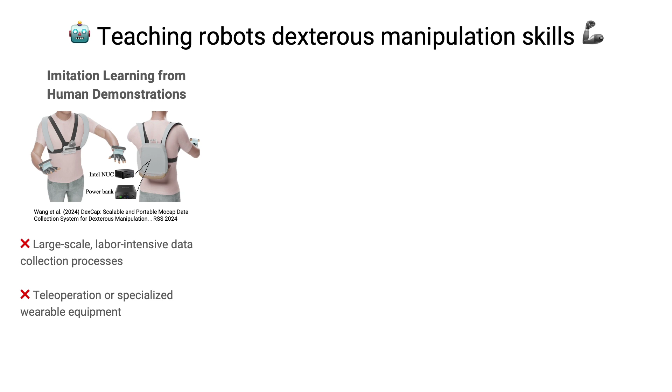IL requires high-quality data to be effective, and thus typically requires large-scale, labor-intensive data collection processes via teleoperation or using specialized wearable equipment. Videos of humans interacting with objects with their own hands are inexpensive to collect and much more scalable, but human videos lack action labels.

To generate these, a common approach is to obtain human hand pose estimates throughout the video and convert these to robot action labels via fingertip retargeting and inverse kinematics. However, human hand pose estimation from videos can be noisy, and even with perfect pose estimates, it can lead to infeasible or suboptimal IK solutions on the robot. These are particularly punishing for contact-rich dexterous manipulation tasks.

Reinforcement learning offers a promising alternative to overcome these limitations by allowing robots to learn manipulation tasks using its own embodiment. However, tedious task-specific reward engineering and unfavorable sample complexity makes real-world RL challenging. Our work thus seeks to answer the question: how can we leverage sim-to-real RL to learn dexterous robotic manipulation with minimal human effort?

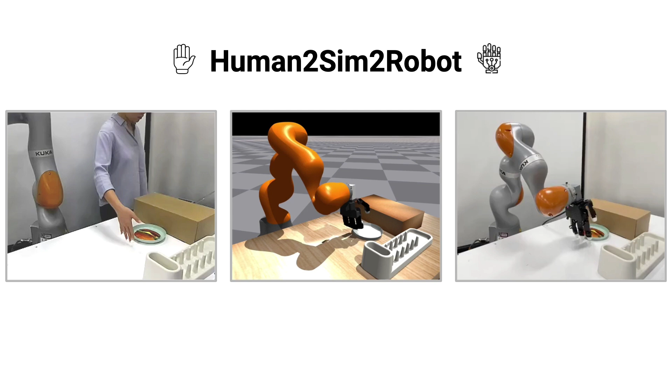In this work, we introduce Human2Sim2Robot, a real-to-sim-to-real framework which trains a dexterous manipulation policy from a single human hand RGBD video.

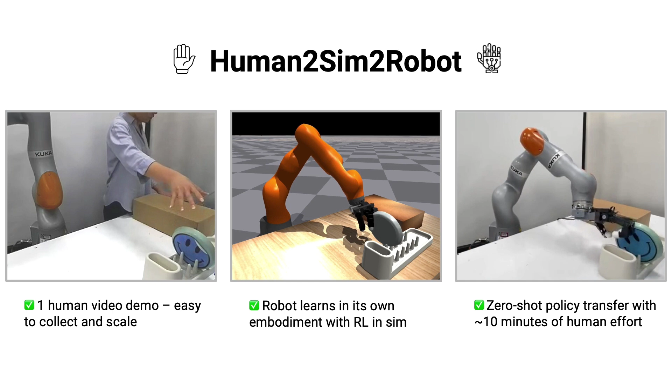Human2Sim2Robot addresses the limitations of existing methods. It only requires one human video demo and removes the requirement on high-quality robot action labels, which is easier to collect and scale. The robot learns a strategy optimal for its own embodiment with RL in simulation, and our RL policies demonstrate successful zero-shot transfer with only a few minutes of human effort.

For the human demonstration, we record an RGBD video demonstration of the human expert performing a task with their own hands, tracking the object pose trajectory and extracting the pre-manipulation hand pose.

Then, in simulation, we transfer the real environment to a digital twin for RL policy training, where the robot is rewarded for following the demonstrated object pose trajectory initialized at the pre-manipulation hand pose. Finally, we deploy the trained policy zero-shot with sim-to-real transfer to a real robot and dexterous hand to execute the demonstrated task.

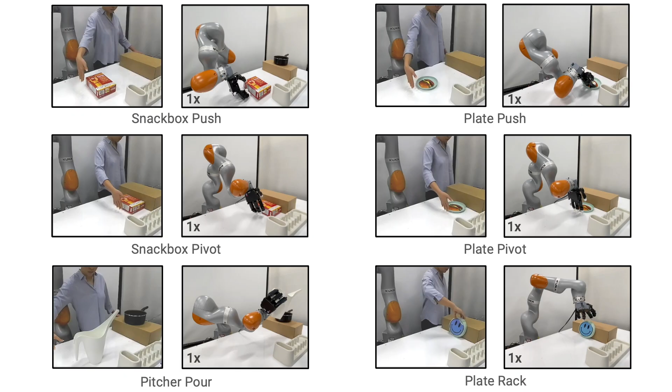We show that these policies enable a wide range of tasks, including grasping, non-prehensile manipulation, and extrinsic manipulation. We demonstrate some of our tasks on regular geometric objects like a snack box, and other challenging objects like a pitcher for handle grasping, as well as manipulating a thin plate.

We also successfully train policies that compose multiple skills, such as plate pivoting, grasping, and insertion into a dish rack.

To elaborate on our method, we begin with the human video demonstration, from which we extract two task-specific components. First, an object pose trajectory, an embodiment-agnostic, object-centric task specification that provides a dense reward that is difficult to reward hack. And second, a pre-manipulation hand pose, a prior and guidance for learning human-like approach behaviors by initializing the robot at the retargeted position from which the human approached the object.

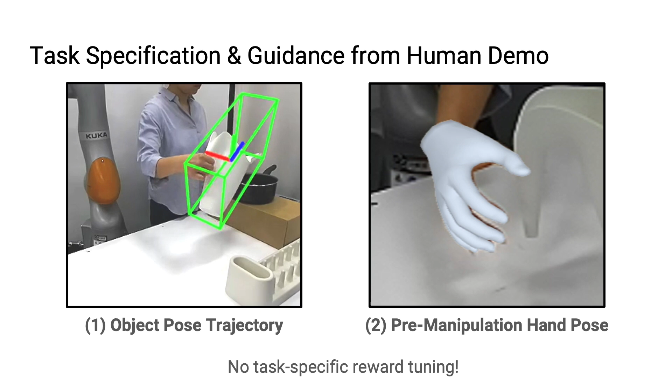With these components, we don't need any reward tuning for different tasks or objects. We extract these two components as follows.

First, from the RGBD video demonstration, we additionally generate per-frame object masks using SAM2 and a scanned object mesh using Kiri Engine, an off-the-shelf LiDAR scanning app. We pass the corresponding RGB, depth, and segmentation mask frames and the 3D object mesh as inputs to Foundation Pose, a state-of-the-art 6D pose estimation model, to generate the object pose trajectory.

Second, we pass the RGB video frames into HaMeR, a state-of-the-art hand pose reconstruction model, and leverage the corresponding depth images to perform ICP registration with the reconstructed MANO keypoints predicted by HaMeR to obtain our pre-manipulation hand pose.

We now show the capabilities of Human2Sim2Robot across a variety of real-world manipulation tasks. All of our robot videos are played at 1x speed.

For prehensile grasping tasks, our policies enable the KUKA arm to successfully grasp the plate, lift it, and insert it into the rack. We see some in-hand manipulation here to achieve a more secure grasp on the plate, allowing it to successfully be inserted into the dish rack.

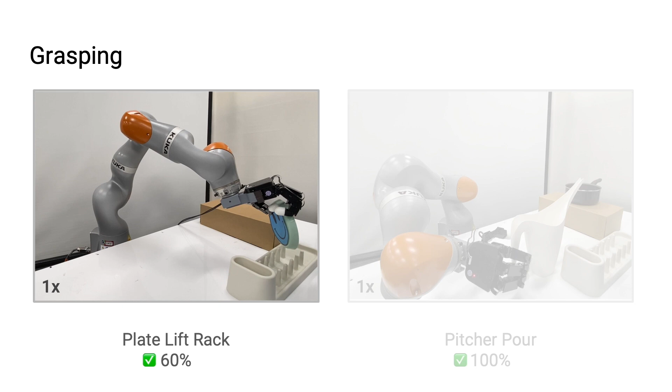On a pitcher pour task, the robot is able to leverage the human pre-manipulation hand pose and object-centric rewards to successfully grasp and lift the pitcher. Here we see that it follows the trajectory as shown in the human demonstration.

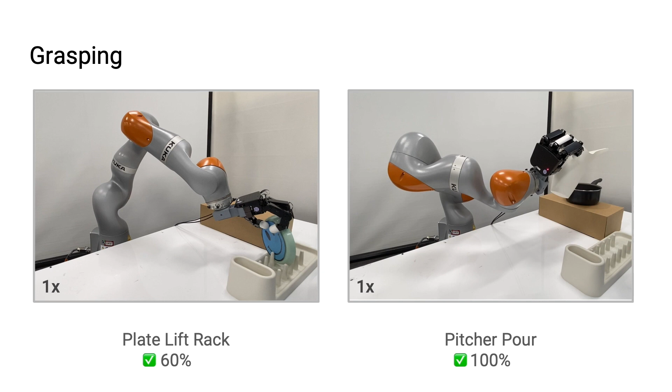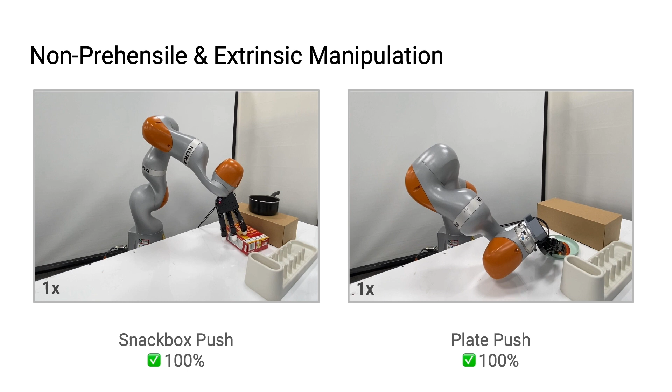We now showcase real-world rollouts on non-prehensile and extrinsic manipulation tasks. For non-prehensile pushing tasks, the robot successfully pushes the snack box and plate to the wall 100% of the time. The robot also pivots the snack box against a static wall and can compose pushing and pivoting, succeeding 100% of the time.

On a more complex multi-step task that composes multiple skill types, the robot pivots the plate, grasps and lifts it, and inserts it into a thin slot in the dish rack. It succeeds 86.6% of the time, due to the challenging rack insertion step.

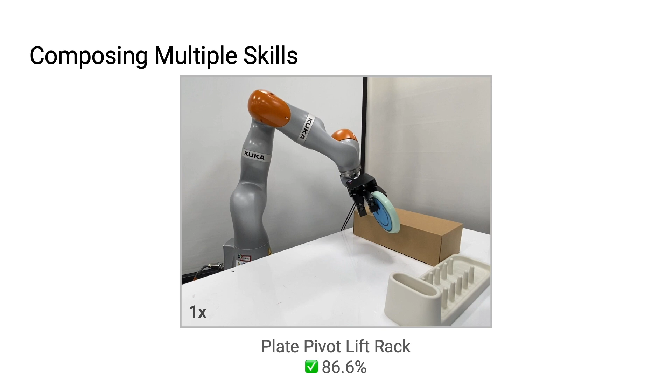We break this task down into 3 steps: pivot, lift, and rack, and give fractional success rates if it partially completes the task. For example, a pivot and lift without racking achieves 0.66 out of 1 for a single trial.

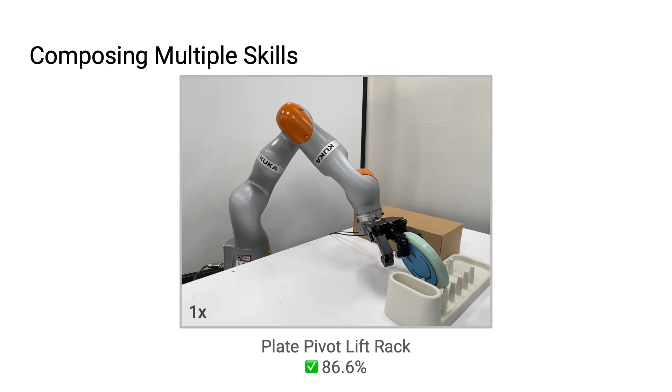Here, we analyze some qualitative behaviors arising from training RL policies in simulation and deploying them zero-shot in the real world. With exploration in RL, the policy learns a strategy optimal for a robot hand with larger fingers and higher friction fingertips than a human hand, thereby successfully crossing the human-robot embodiment gap.

On the left, the robot learns to use its knuckles to push the plate across the table, instead of following the human to use its fingertips, as they can get caught dragging on the table due to their high friction.

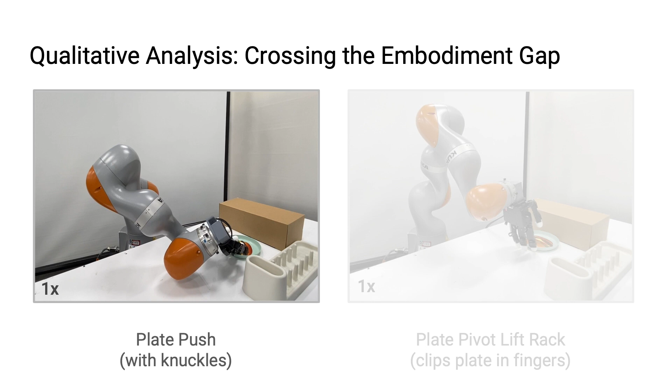On the right, the robot learns to clip the plate in its fingers, as it's hard for the Allegro hand to manipulate the plate in the exact same way that the human hand does, as it has a retracted thumb. Thus, the policies can leverage the demonstrated human behavior as a useful guiding strategy for learning, but training policies with RL allows for deviations from this strategy where it is necessary.

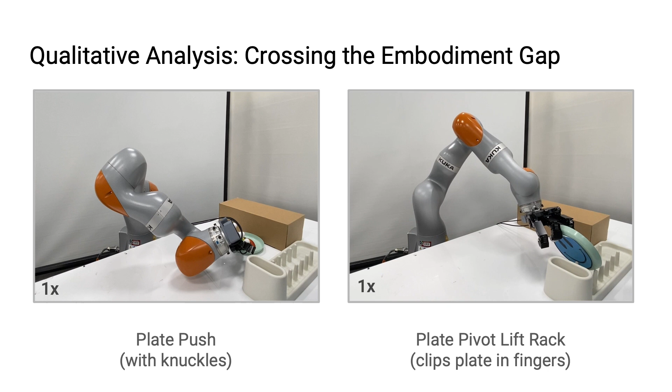In addition to successfully crossing the embodiment gap, Sim2Real RL enables policies to better handle out-of-distribution states and recover from near failures. On the left, the robot is able to adapt to an initial object state not shown in the demonstration and recovers from a near failure.

On the right, similarly, the robot can adapt to the plate being placed out of its initial reach and recovers from a close failure to successfully complete the task.

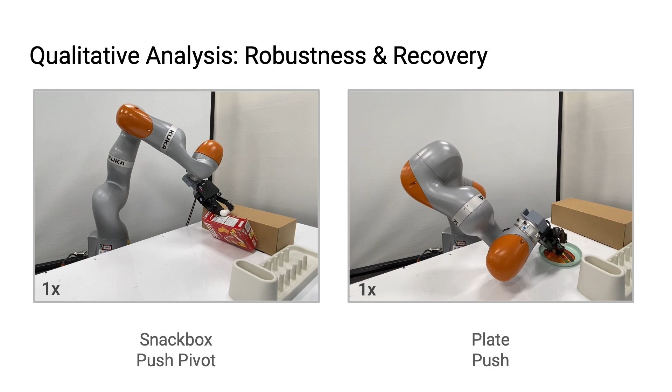Here, we demonstrate that our policies are robust to a large variety of visual distractors, such as background changes, lighting changes, and distractor objects, as well as physical obstacles and perturbations. This is a benefit of training our RL policies with low-dimensional 6D pose observations, rather than images, as well as introducing random forces during simulation training.

For our baseline comparisons, many one-shot imitation learning methods from human motion require retargeted trajectories to replay open loop or learn a direct mapping from observations to retargeted actions.

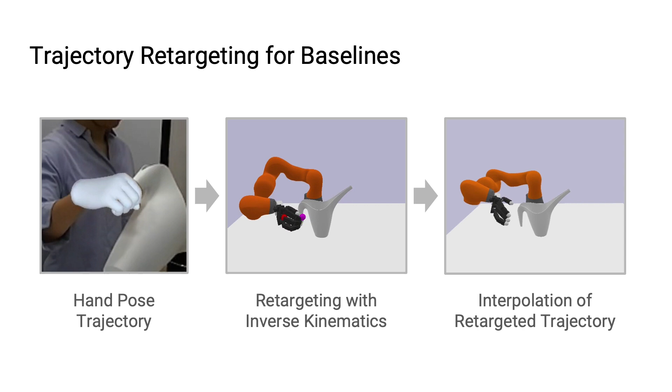To demonstrate the strengths of sim-to-real RL, we contrast this with extracting the hand key points for every frame of the human demonstration. We use these to perform inverse kinematics to get the robot configuration at each time step so as to match these target key points, illustrated with colored spheres. We then reconstruct a retargeted trajectory on the robot by interpolating between these per time step IK solutions, which we use for our baselines.

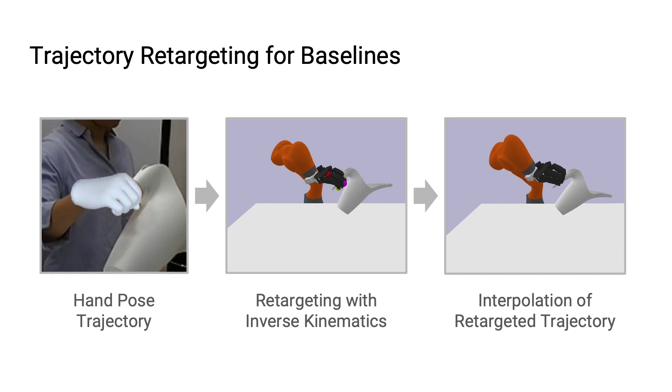We compare Human2Sim2Robot policies with 3 baselines: replay, object-aware replay, and BC. For replay, we simply replay this trajectory open loop. For object-aware replay, we warp the retargeted trajectory by the transformation between the initial object pose in the demo and at test time. And for BC, we perform object-aware replay 30 times and train a diffusion policy on these demonstrations.

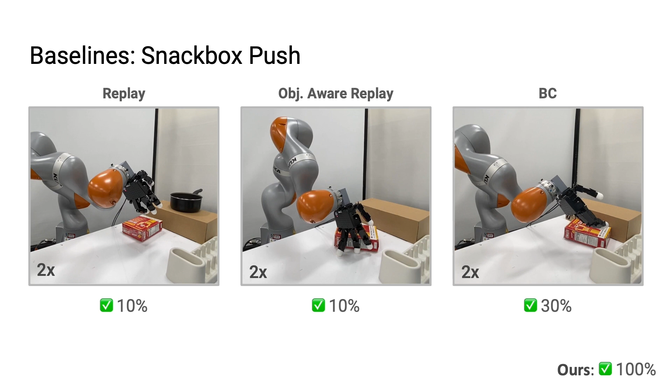For snackbox push, though this task is fairly simple, all 3 baselines struggle due to inaccuracies in hand pose estimation, causing the fingers to drag along the table and get stuck. We see that retargeting strategies often struggle when applied to robot hands with large morphological differences, particularly for contact-rich tasks.

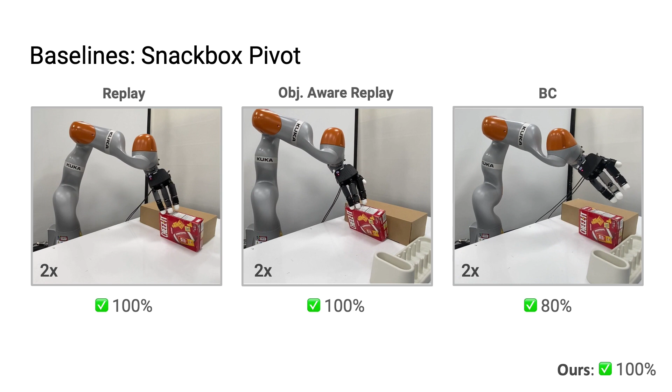For snackbox pivot, all baselines were fairly successful on this relatively simple task, as the successful robot strategy aligns with the human strategy. For snackbox push pivot, the baselines are sometimes successful, but generally less consistently so than our policies.

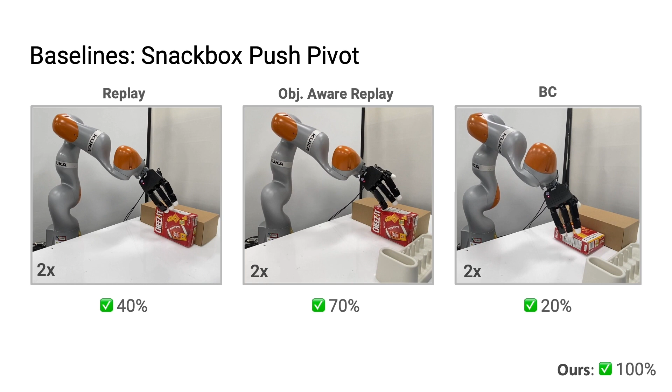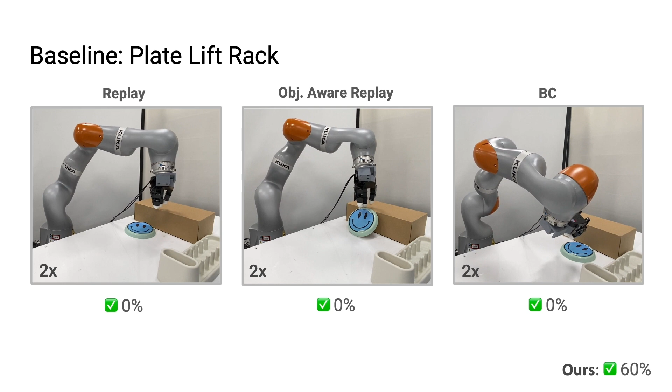For plate push, like snackbox push, hand pose estimation errors cause the high-friction Allegro fingers to drag and get stuck on the table. For plate lift rack, hand pose estimation of the fingers is often challenging when occluded by the plate, causing unintended contact before grasping. This demonstrates the challenges of naively imitating actions or rolling out trajectories open loop for precise manipulation.

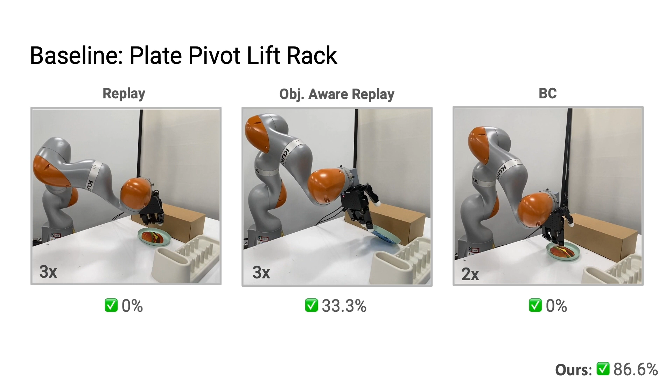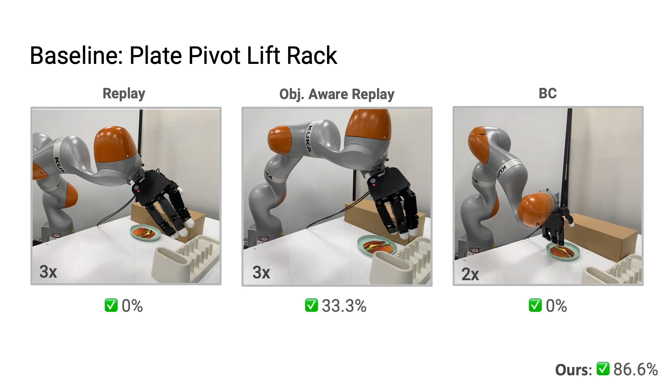For plate pivot lift rack, our long horizon task, the baselines generally struggled, though object-aware replay was able to successfully pivot the plate. Overall, we see that occlusions and modeling errors can make these hand and object predictions inaccurate, resulting in unintended table collisions or hand configurations that are not suitable for our tasks. This was especially the case for the thin plate that is challenging to manipulate.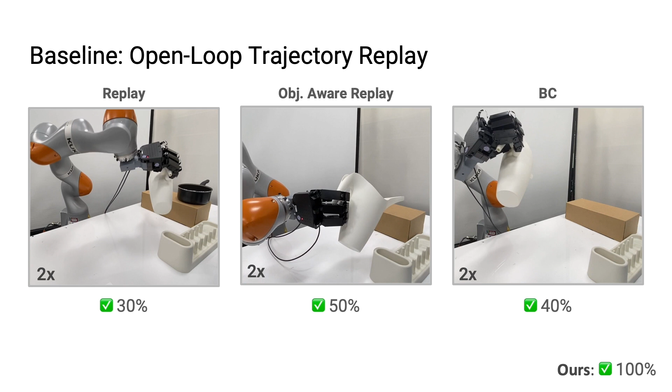For pitcher pour, while the baselines were somewhat decent, simply following human actions does not always lead to the most successful pouring motion, as failing to track the object trajectory ultimately leads to an unsuccessful pour. Therefore, learning a mapping from observations to retargeted actions is often unsuccessful.

We conduct several ablation studies to verify the design choices of our framework. We first study the impact of dense object trajectory tracking rewards for training our RL policies. We do this by comparing to 3 modified ablations.

Fixed target computes the per time step reward with respect to the final object pose. Interpolated target replaces the per time step object pose trajectory from the demo with an interpolated pose trajectory between the initial and final object pose. Downsample trajectory reduces the temporal resolution of the dense object trajectory from the demo into a series of waypoints.

Next, we study the usefulness of a pre-manipulation pose initialization obtained from the human demonstration. To do this, we compare to a default initialization pose far from the object, an overhead initialization directly above the object, and a pose identical to our pre-manipulation pose but 20 cm further away.

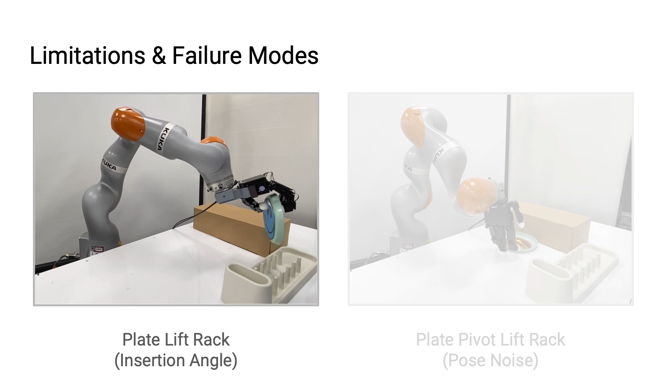To conclude, we present some common failure modes of our method, particularly with challenging objects like the plate. In this example on the left, despite leveraging the human pre-manipulation grasp faithfully, certain angles for tasks like insertion are challenging due to kinematic differences of the robot.

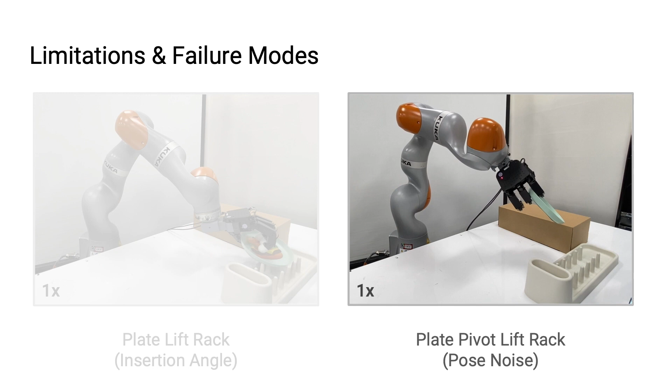Next, pose detection noise can affect policy performance. In this example on the right, the real-time pose prediction of the plate flipped in the z-axis during execution, ultimately causing the policy to fail.

Future works can explore addressing these limitations, and overall our real-world robot performance, baseline comparisons, and thorough ablation studies demonstrate the strength of our method.